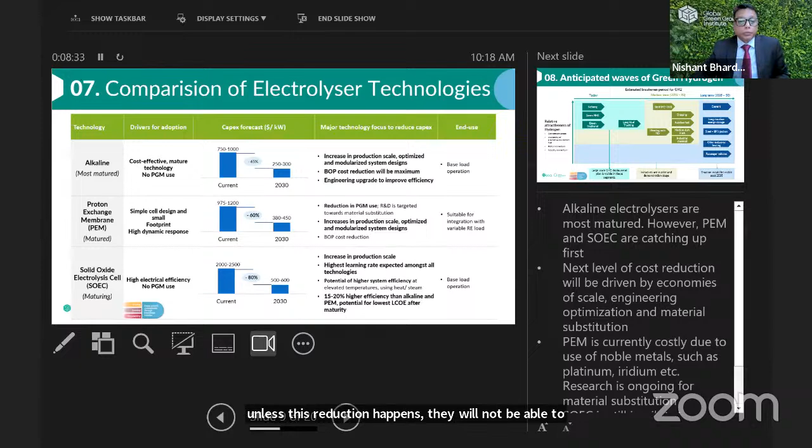There are 3 anticipated waves of green hydrogen: the near future, which is today and is happening now; the medium term, until 2035; and the long term, from 2035 to 2050, depending on the relative attractiveness of hydrogen.

What we see today: refineries, green ammonia production, green methanol, and long-haul trucking systems moving towards green hydrogen. In the medium term, we'll see more blending with natural gas, shipping, aviation, medium trucking systems and freight, and the industrial chemical industry moving towards green hydrogen.

In the long run, cement, iron, steel, other industrial heating, and passenger vehicles would be a long-term transition using green hydrogen. So this transition will happen in waves, and that's what we think today, but the situation might change depending on technology developments in various sectors.

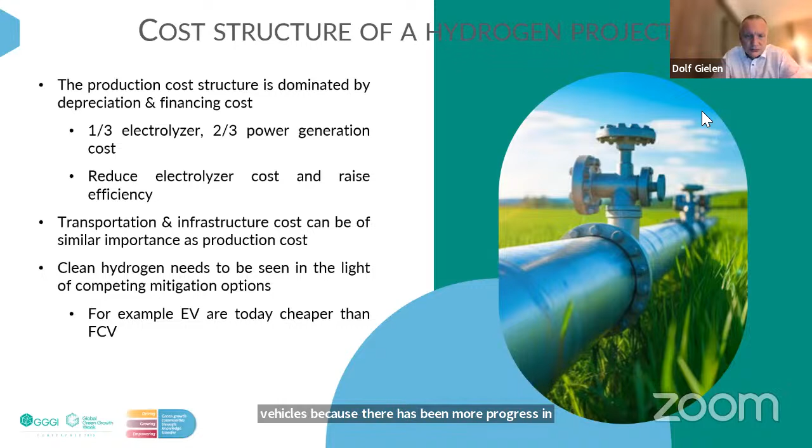So what can you do to come to a viable business case? You can first try to create a niche market, for example by phasing out the use of fossil fuels, or by providing incentives for renewables. You can reduce the technology cost, either by reducing the unit investment cost, or also by reducing the cost of financing.

And that's where we very much focused in this study: how to reduce risk and the weighted average cost of capital.

We looked at a large number of risk factors, around 40 of them, and found that a number of them, around 6, are really critical. Some are more important for the early phases of project development, others more in the later phases. That includes, for example, off-take risk: you need to find someone at the moment who's willing to pay you for a long period, maybe 15 years or more, a price for a product which is more expensive.

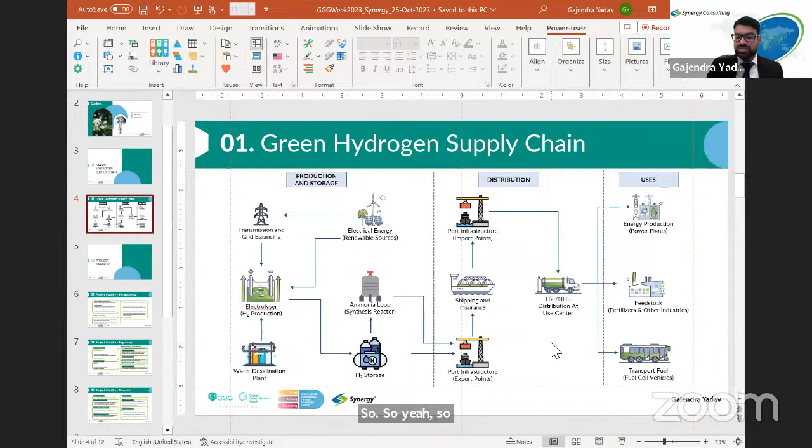Then moving to the next stage, which is transport to the local industry. It's one thing to get it to the port, but one also needs to think about inland transportation - from the port to the industries or factories that will effectively use this. So this is broadly the value chain or supply chain of an entire green hydrogen project.

Now moving on to aspects which have a significant impact on project viability. Based on my experience talking to various stakeholders, these technologies have worked perfectly in silos. Electrolyzer is a 100-year-old technology, with the first one put in Egypt. Water - the Middle East runs on desalination processes. Ammonia - air separation units, almost every oil and gas facility has air separation units. Quite simple, the Haber-Bosch process. Currently, gray or blue ammonia is produced using the Haber-Bosch process, and then this ammonia is transported. So individually, if you look at all these technologies, they have existed for quite some time in isolation.

They are very well banked, the risks are well understood, but the key risk perceived by everybody is that people don't know how these technologies will behave when put together - they are quite concerned about the interface risk. Second, because of the renewable aspect, there is intermittent power supply compared to connecting directly to the grid, where power is more constant. Here there is intermittent power supply because of the intense variability in solar and wind, which are the backbone of green electron production. So that limited knowledge is seen as one of the key risks by lenders or financiers.

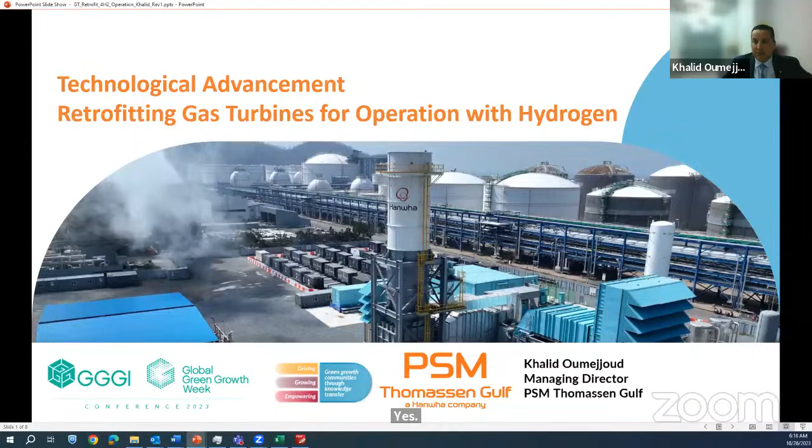Effectively, the title of the presentation is Technological Advancement, Retrofitting Gas Turbines for Operation with Hydrogen. But before I go there, let me introduce my company, PSM Thomassen Gulf. We are owned by Hanwha. Hanwha is a Fortune 500 company, one of the largest conglomerates in Korea, with over 70 years of history and $61 billion of total sales, with 4 key sectors of operation: energy and material—that's the area where I'm sitting—then aerospace, finance, and retail.

One key element that I want to present is effectively the strategic overview for a path to carbon neutrality. How is Hanwha looking at this problem? Effectively looking into getting to net zero, looking at the full value chain from photon to electrons.

If you start from the left here, Hanwha has a division called Qcells, that is supporting solar panel assets as well as manufacturing. IRA has been a good element for QCell as the leading supplier for residential and industrial markets in the US.

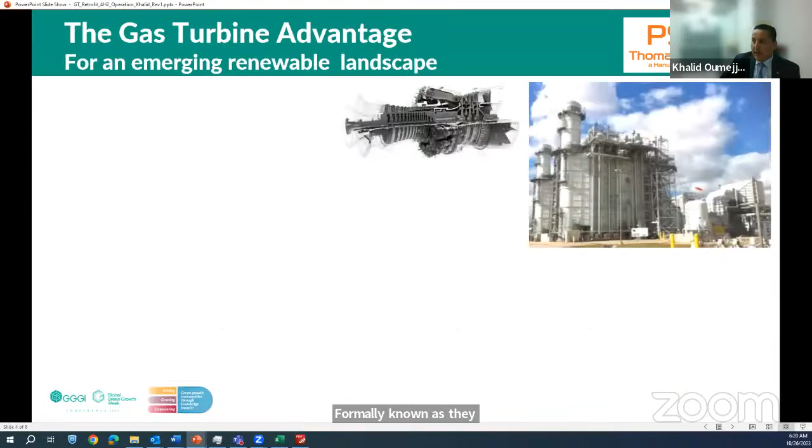Why the gas turbines? Effectively, in this renewable market, we're going to need some elements to balance the grid. Here we're talking about features that can load very fast, and also has the ability to run on multiple fuels, in this case hydrogen, that effectively with the excess in renewables can be produced and stored. And then when the sun is not shining and the wind is not there, we could release that stored hydrogen back into the gas turbine to continue the green cycle.

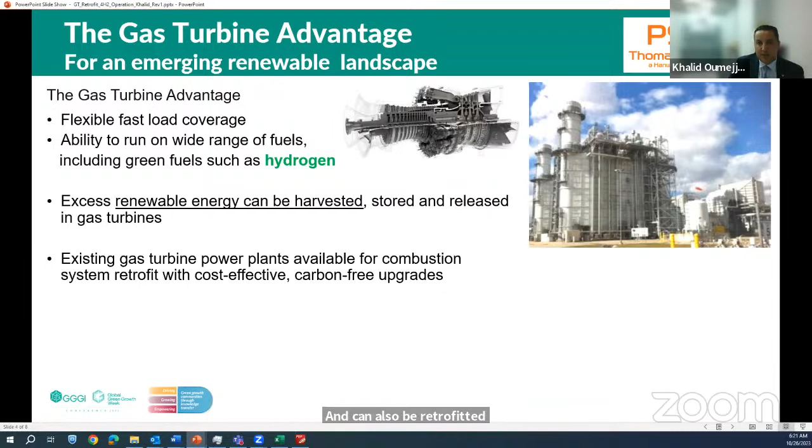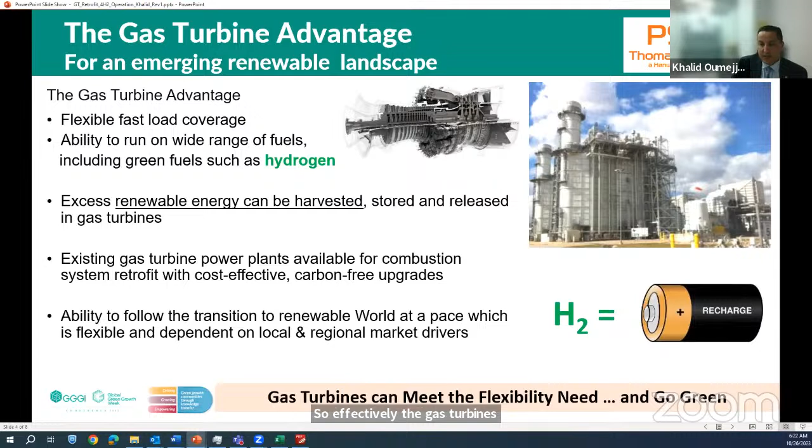Gas turbines are machines that can load very fast and are very flexible, and can also be retrofitted specifically on the combustion side with cost-effective solutions that allow operation carbon free. So if we think about the gas turbine as a large battery where we could release the hydrogen that's being generated when needed, it allows that ability to transition to a renewable world and allow the flexibility. So effectively, the gas turbines can meet the flexibility needs and still go green.

How are we able to do this? We can talk about three key elements that are required for conversion of existing assets to be able to run on hydrogen. These technological advancements are, first, on the fuel skid. This is where the mixing or the transition from the current fuel to hydrogen can happen. So you can either run on hydrogen or mix with natural gas, which is how we actually started this operation, running on a blend of natural gas and hydrogen up to 35% and recently up to 60%. So this is the first element, regarding the fuel system, to be able to switch between the current stream of fuel and the hydrogen, and or blend the two.

The second key element is what we call the brain of the operation, the auto-tune system. This auto-tune allows rapid sensing of the fuel stream and adjustment of the engine operation to be able to maintain stability and also maintain emissions below regulatory limits. So this system watches over the stack to make sure emissions are below the limits, and watches over the operation of the engines and all the parameters. It has some self-learning algorithms that allow it to remember. So effectively, the fuel stream can vary, but the machine can still continue in operation, because this is very critical given the current situation where the stream of hydrogen is not always there.

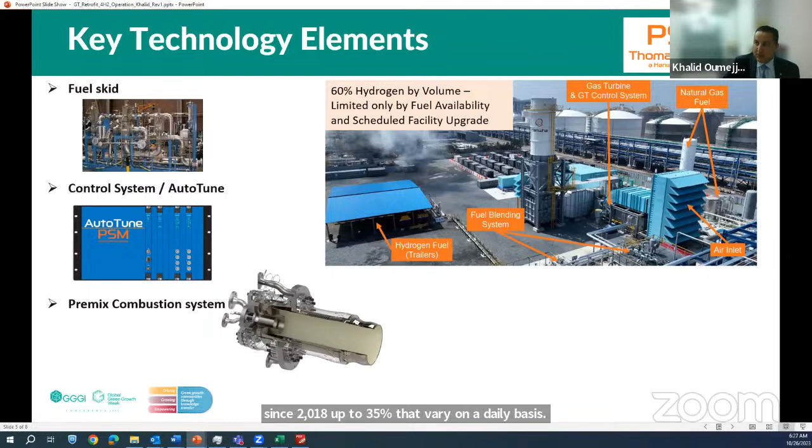So as I mentioned, we've been able to operate since 2018 up to 35%, that varied on a daily basis. And then earlier this year, we have been able to run up to 60%. But most importantly, we have been able now to demonstrate at a high pressure rig at a real engine condition operation up to 100% hydrogen. That means we can transition from 100% natural gas all the way to 100% hydrogen and be able to operate in anything in between, while still maintaining emission.

Here we're talking mainly about NOx emissions below the limit, because when you run with hydrogen, there's no more carbon. So the only element we have to worry about in terms of emissions is NOx, while when we run with natural gas, we have to worry about both NOx as well as carbon emissions, or CO2.

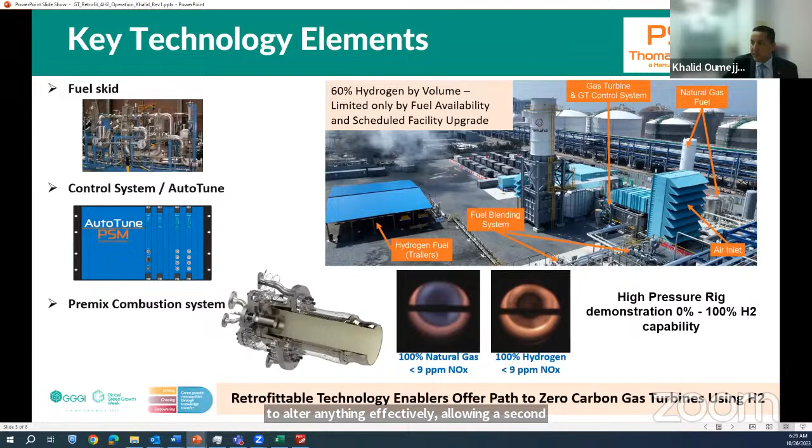The advantage here is that when we apply this technology, we are able to future-proof the existing assets to easily transition into the hydrogen economy, effectively running on natural gas today. As the stream of hydrogen is available, the operators could seamlessly transition without having to alter anything, effectively allowing a second life on these machines and not ending up with stranded equipment.

These conversions, when we talk about the hydrogen gas turbine, can be fed with either green or blue. Effectively, one thing that we like to see is this retrofit, or this technology, is color blind. It can take in hydrogen. It doesn't matter if it is green, blue, or gray. It has been already proven on gray hydrogen, but effectively it's still the same molecule. The color is depending only on the stream where it comes from.

We show here elements of how it could be used with the storage ability to turn a gas turbine into a large battery, allowing future-proofing of existing assets, basically with a cost-effective solution, allowing clean energy to be dispatched on a large scale on the grid.

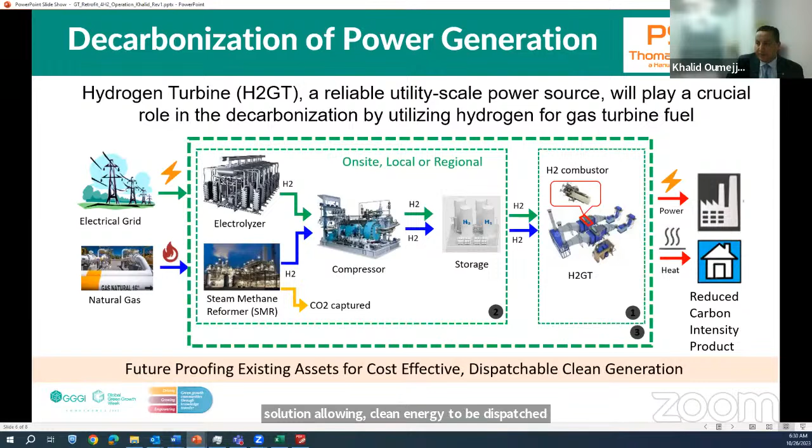So just to conclude here, effectively the gas turbines are machines that are rapid, flexible for grid balancing, mainly with the now excess in renewables. We have seen this in the US, for example in California, with the addition of the excess of renewables, where these gas turbines, because of carbon emissions, have been shut down, but then they are required to come back very quickly when the sun is not shining or the wind is not blowing. And these gas turbines have proven the ability to allow balancing of the grid and be dispatched very quickly to alleviate these concerns.

They also have the opportunity, as we have shown here, to run on multiple fuels, including hydrogen, which is a clean fuel that can be stored and dispatched on the gas turbines. We have proven 5 years of operations with single-digit emissions up to 35%. We have now multiple projects in commercial demonstrations, one in Korea and a few in the US, up to 60% hydrogen. We have finally cracked the 100% hydrogen operation capability in a high pressure rig, and we are going for a full engine demonstration early next year.